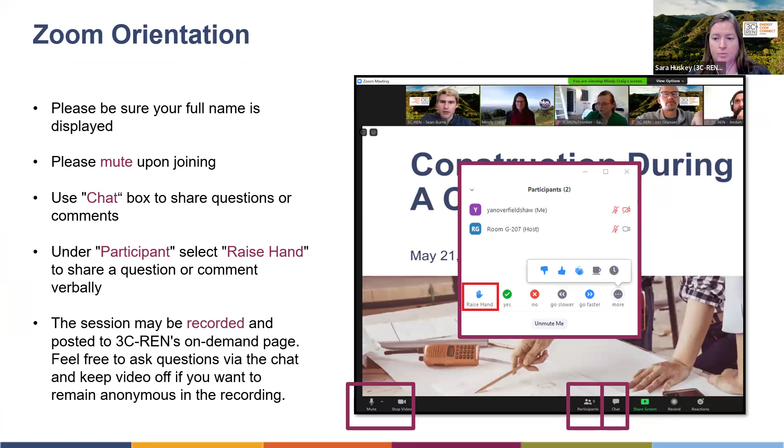Hi, okay, I'm in a meeting.

So a few words about us. 3C REN, we're the Tri-County Regional Energy Network. We're a collaborative partnership between San Luis Obispo, Santa Barbara, and Ventura counties, working to improve energy efficiency in our region by offering free programs and services for building professionals and households. 3C REN currently offers 3 programs.

The first program is our Energy Code Connect, which this course today is brought to you through. This program serves building professionals by offering Title 24 support for everyone from plans examiners and inspectors to architects and contractors. And we have our Energy Code Coach service through this program, which is an over-the-phone, online, and in-the-field support for residential and non-residential Title 24 questions.

Our next program is our building performance training, which serves building professionals by offering technical and soft skill trainings related to building science principles, high performance buildings, marketing, and communication techniques. And then we have our home energy savings program, which incentivizes contractors and helps residents save money to make their homes healthier with energy efficient upgrades through incentives and rebates. And with that, I'll pass things over to Jennifer.

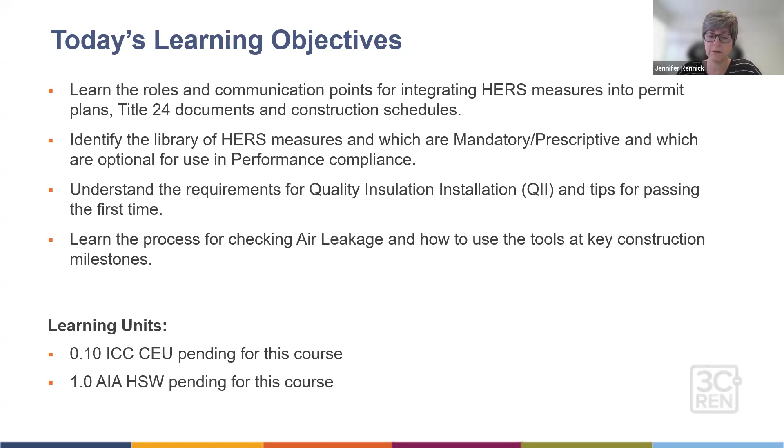Just to let you know, we've got learning units for today's course through the AIA and also through the ICC. Today's focus is really going to be on the envelope and quality installation, QII, and kind of the process for checking for building air leakage. A lot of the other HERS measures we will be hitting in our part 2 course. So today is kind of part 1.

So part of HERS measures for single family and low-rise multifamily construction is a process: we show compliance first, then we need to show that whatever we had put in those compliance documents to show that we met the energy code is installed properly. And then the third part of that process is that we have a verification that the installer installed those things to meet those installation requirements.

So on the single family side, we have our CF1R form, which is often called our Title 24 report. And then we've got our CF2R forms and CF3R forms, which deal with the installation requirements and the verification requirements of those items installed. Those are the 2 forms that Paul usually works on.

Oh, I should back up. My gosh, I didn't really introduce myself or introduce Paul. We just kind of went in on it. And then Sarah didn't really say that much either. You two should have stopped me. Okay, back up.

Jennifer Rennick, I'm an architect and a certified energy analyst. So in my world, I'm dealing a lot with that CF1R form. And then I'm joined by Paul, who is a HERS 1 and HERS 2 rater, BPI analyst, and is dealing with the in-the-field verification testing, and collecting those verification forms sometimes on the builder's behalf. Sometimes Paul can jump in, but yeah, Paul's mostly going to be taking care of the CF2R and CF3R forms in this process.

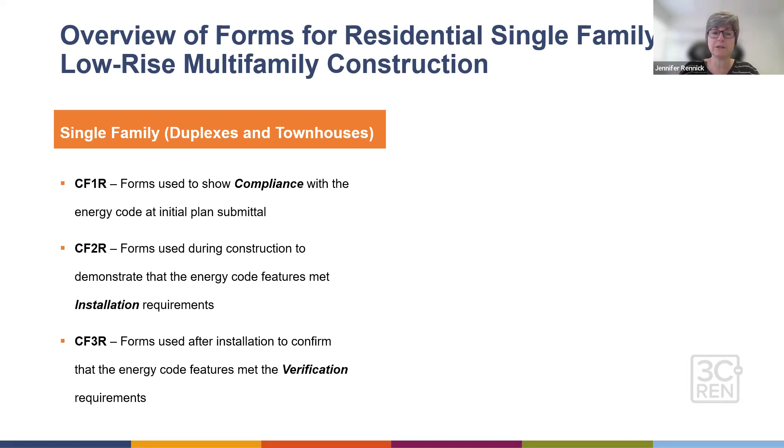Okay, so back now to the overview for the forms for residential, single family, and low-rise multifamily construction. We just reviewed those basic forms on the single family side, which includes duplexes and townhouses. On the low-rise multifamily side, meaning low-rise 3 stories or less, new under the 2022 Energy Code, there's a different set of forms.

So now we have an LMCC for low-rise multifamily compliance forms, and that would be the realm I work in most of the time. And then the LMCI and LMCV forms, which deal with the installation requirements and the verification requirements of those energy features.

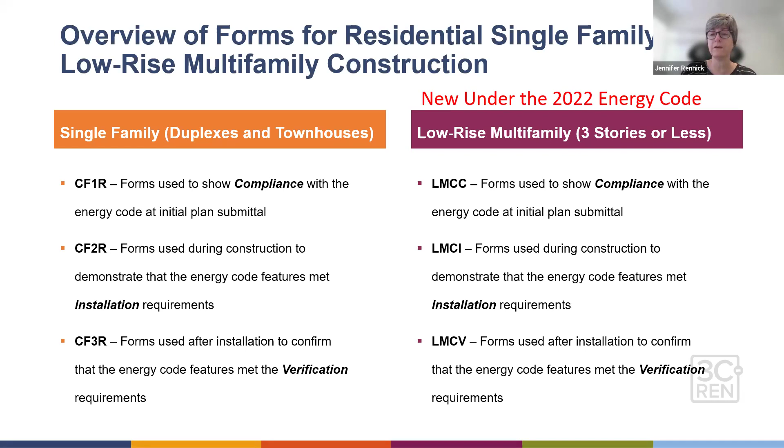We will address a little bit about where the California Energy Commission stands with those multifamily forms as we go through this. But another big picture item is that these forms do have to be registered with a home energy rating provider. HERS stands for Home Energy Rating System, and Paul is a HERS rater.

Right now in California we have two HERS providers, CalCERTS and CHEERS. These organizations are responsible for training and certifying HERS raters, and they support the California Energy Commission with the HERS registry. So many of us who've already worked on single family residences in California are probably familiar with HERS, HERS raters, and the HERS registry.

However, new in the 2022 Energy Code, the California Energy Commission pulled the multifamily portion of the building code out of the single family section. Multifamily now has its own section and its own set of forms. And so as of now, there isn't an up and running HERS registry yet for low-rise multifamily projects.

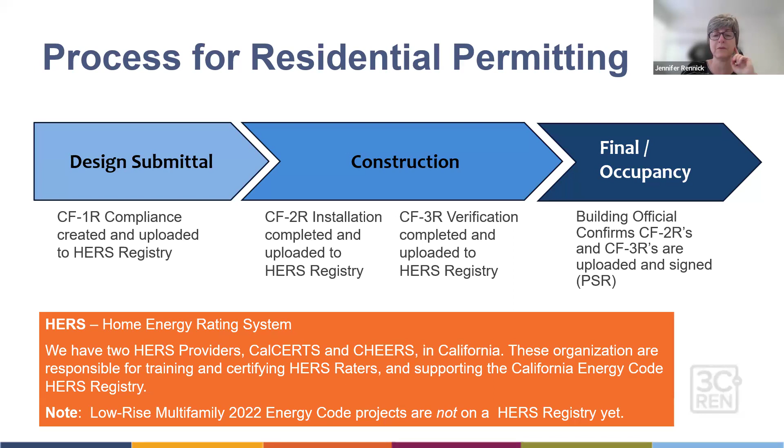In order for you to get an idea of what these forms look like—because one of the things I found, even as an energy analyst doing the CF1R side of things, the Title 24 report side of things—it's hard for me to even look at a project and see what the CF2R and CF3Rs coming into place look like. So what I do is go into the California Energy Commission website and take a look at the forms.

So that I have a draft copy and really have a better understanding of what they are. And if you go onto the California website, you can navigate to this page. This is the page for residential forms, and you can click the plus mark and it opens up and gives you a list of all the forms. I'll show you what that looks like in just a moment.

And kind of an aside—you're going to get a copy of the slides, by the way—but I just want to note here that most of the forms we're going to see are for reference only. So you'll eventually get a watermarked copy that's registered with the HERS provider.

And for the multifamily forms right now, one of those workarounds is that for prescriptive compliance, you can have a form-filled PDF through Energy Code ACE. And according to Energy Code ACE, the performance method forms are quote unquote coming soon. Then they're talking about those forms that would be equivalent to the CF2R, CF3R—it'll be the LMCI and LMCV forms.

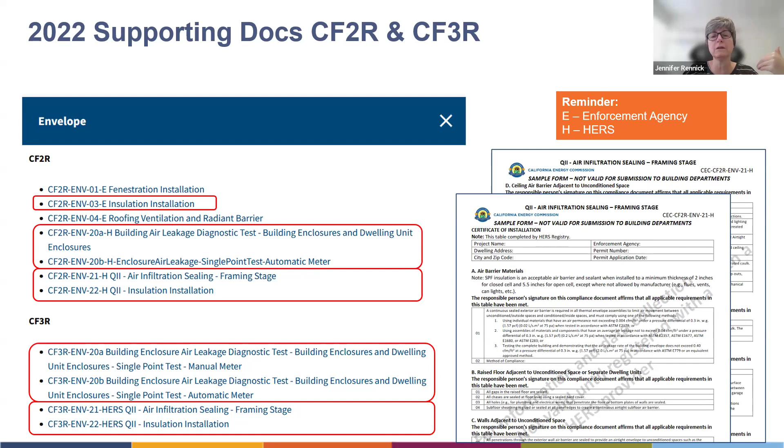And there's some CF2R and CF3R forms that go with that. As a reminder, if you go take a look at this list, or even when you're looking at the forms, if you see an E at the end of that form designation, the E stands for enforcement agency and the H is for HERS. Not all of them have an H after them. For example, the CF3R envelope 20-A, the building enclosure diagnostic testing, only your HERS rater could do that test anyway. So for the most part, you'll either see an H or they'll actually spell out HERS after it.

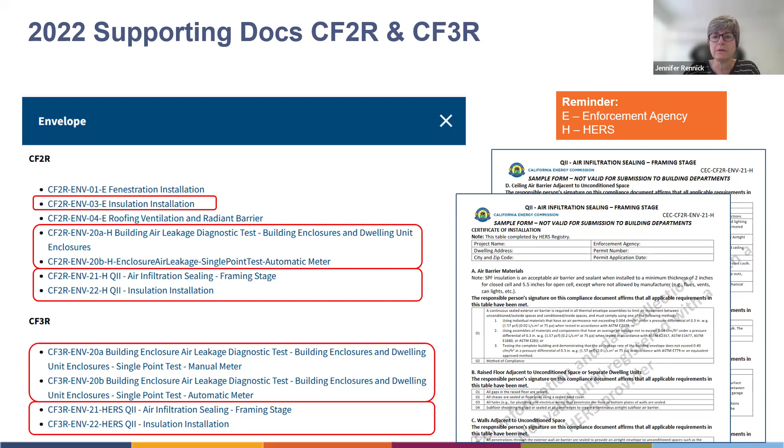And Paul, jump in on any of this stuff if you think this is kind of the boring stuff. I think it's a little boring, but it's necessary to understand this. Sure, then after we go through this, we'll get to the part with the pictures, and Paul can really jump in on what he's looking for and what he does. And then we could talk more about how you need to work with the architect, the installer, the builder, and the HERS rater.

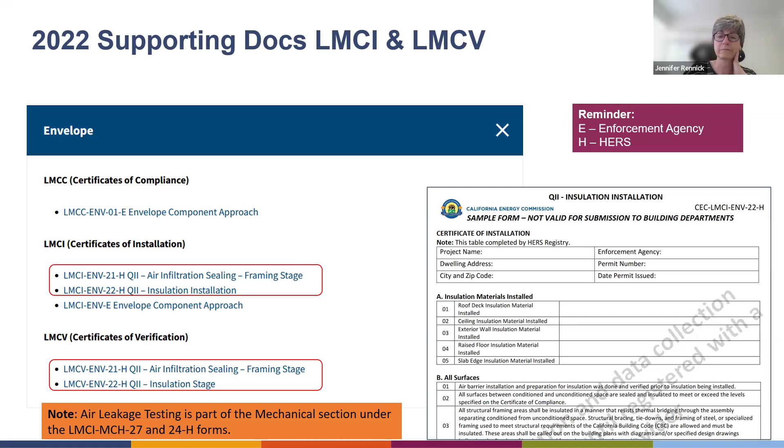Okay, so for the multifamily project, the LM for low-rise multifamily CI and CV forms, you can take a look at that. And we've got QII forms, quality installation, for both the certificates of installation and the certificates of verification. However, if you're wanting to know more about air leakage testing for multifamily, it just so happens that the air leakage testing is part of the mechanical section. It specifically would look at the LMCI or CV MEC 27, MCH 27, and 24H forms. Today we're going to focus on the envelope forms.

So when you go into the CalCerts website, and they have something similar on CHEERS, but I'm most familiar with CalCerts, so I'll address this as an example. You're going to see a list for a given project of CF2R and CF3R forms. And along with that list, you'll see those envelope or those MEC, or your plumbing, battery storage system, etc. These are the possible forms that could be triggered. Then you're going to have two columns that say yes, the certificate's needed, or no, it's not applicable. This will give you an idea as the architect, or have your energy consultant double check on this stuff if you want to know what forms are being triggered by their energy analysis.

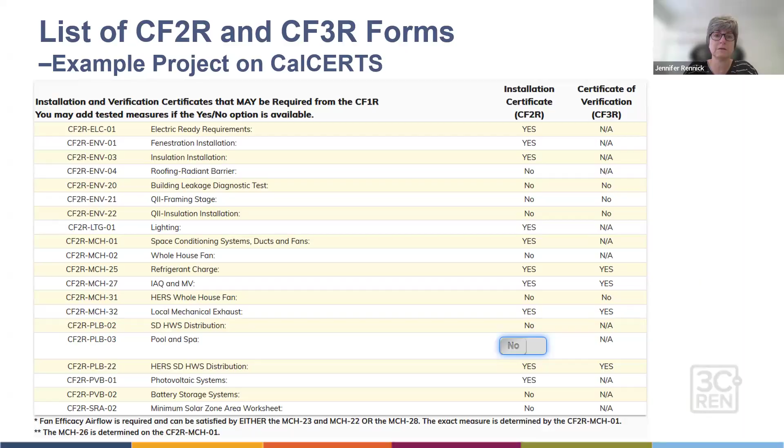So after those CF2Rs and CF3Rs are complete, the project can obtain final occupancy. So the big picture is: get the CF1R on the HERS registry, CF2R on the HERS registry, CF3R on the HERS registry, and now the enforcement agency, or AHJ, often heard, authority having jurisdiction, your planning and building department folks, can access those watermarked forms. What they really want to know is if everything you have to do is a pass. You can see on this slide the watermark will show up, like in this example, as a CalCERTS, Inc. with the star across the pages. And if it doesn't have that on it, it hasn't been uploaded and gone through the proper HERS registry, except for multifamily low-rise, they haven't gotten there yet.

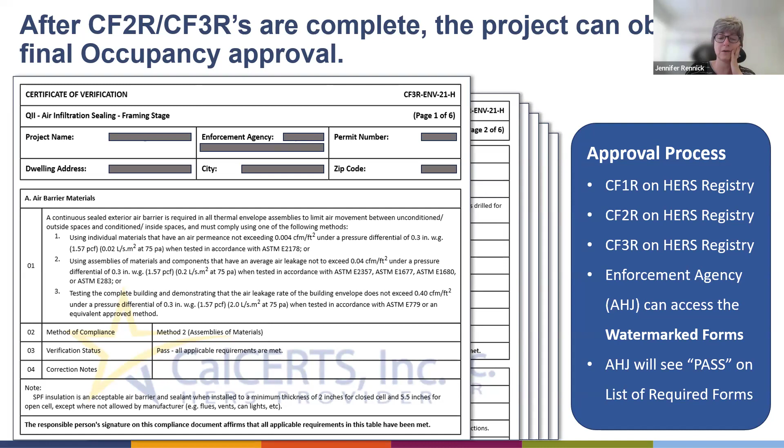So you'll still see, if you're an authority having jurisdiction or an architect getting those forms, forms that say not registered, but you will have to accept them anyway until the HERS registries are set up. So the authority having jurisdiction, once they go into CalCerts or CHEERS, they're going to be looking for the PSR, which is the project status report, to show compliance. What they're really looking for, and we've heard it in our office, is at the job site they just want to see the green dots or the green check marks. So they're looking for this part online, for everything to be checked, that it's complete.

So if I can just jump in, to the builders in our audience: either you as the builder or your individual subs are responsible for their CF2Rs in residential construction. A lot of installers are not savvy with the forms that are uploaded. So you as a builder, if you have staff that can supersede that or approve above your subs, you're allowed to do so, at least in both of the registries. Oftentimes, myself as a rater, I will upload the 2Rs on behalf of you, and then you will have the responsibility to approve those uploads in due course so that we can complete the circle. That's my input for that.

Sometimes there's a project we're all working on together, and the authority having jurisdiction just kept showing the screen on the iPad, basically saying, hey, I just want to see these check marks here. And the builder's like, okay, but what the heck does that actually mean? What am I missing? What really needs to happen?

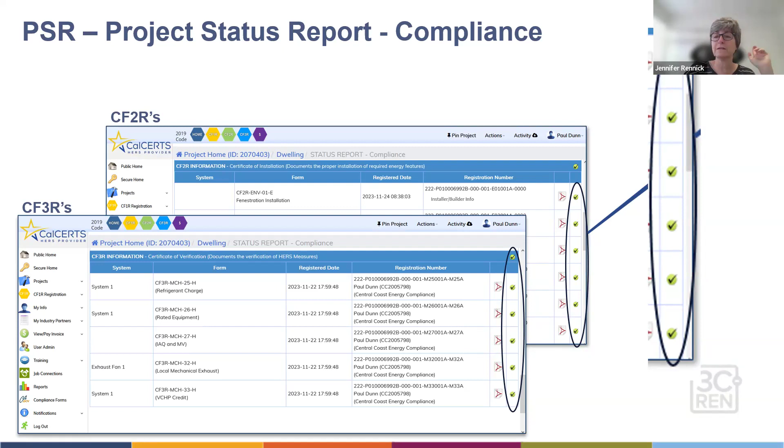That's where you need to coordinate with folks early on. So this next slide, we're going to go through that and show that a lot of this really works best as a team sport. So this flow process is that you're going to have your architect work with the energy consultant, and they're going to need to coordinate and have a CF1R document that shows that design meets the energy code.

And on that, a lot of times we're doing a performance method, a computer energy model. On that form, there's going to be a HERS feature summary that will show anyone who reads that report what kind of HERS measures are being triggered. So in this example, quality insulation installation is being triggered.

And it's worthwhile to note that QII is prescriptively required if you're going to comply using the prescriptive method, which is like a recipe card. You follow all the pieces, all the food ingredients on the recipe. You're not doing a custom chef special right now. It's just you're following the recipe. You got to do everything.

And in that recipe, QII is now a requirement under the 2022 Energy Code. So if you do the performance method, you could trade off not having to do QII, but a lot of times, since it's prescriptively required and your project's going to get compared to doing QII, we're seeing QII is just on a lot of jobs. So hence this class, and hence all of us talking about it.

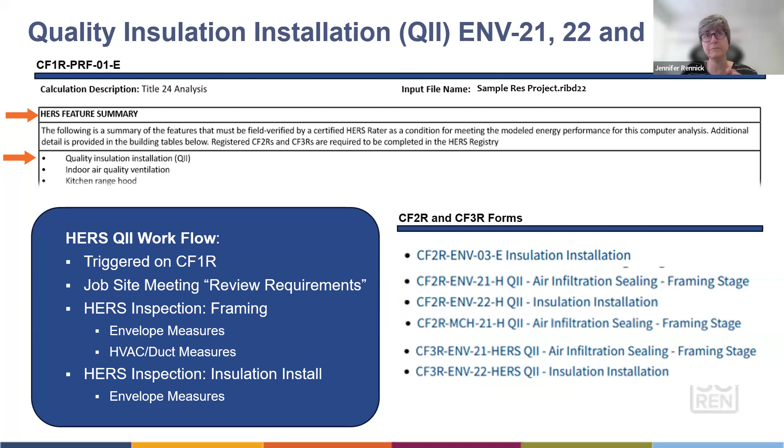I think it's good that I remind folks that the California Energy Commission, big picture, puts a lot of weight into the envelope, into the building assemblies for conserving energy. So how those walls are constructed, how the roof and attic is constructed, how your doors and windows and all the penetrations are air sealed, all of that is really forward up front in terms of energy savings in buildings, which is a tiny part of the real big picture of where California is going in terms of conserving energy, because it means the state does not have to build huge new power plants if we can just conserve and more wisely use the energy we're already able to create with our existing infrastructure, not including adding renewables to that portfolio.

So air sealing, QII, framing stage for low-rise multifamily, those forms are basically similar to the single family forms, except there's some items specifically describing where assemblies must be sealed to stop the air movement between dwellings. And also this form more explicitly spells out what air barrier materials, in terms of the actual technical requirements, can be used for air barriers.

In multifamily, it's not unheard of to use alternative materials. You can show compliance by doing the building air leakage envelope testing, not to exceed a certain amount. That way, if you use materials that don't specifically meet the air barrier material requirement, the testing is another way of demonstrating compliance.

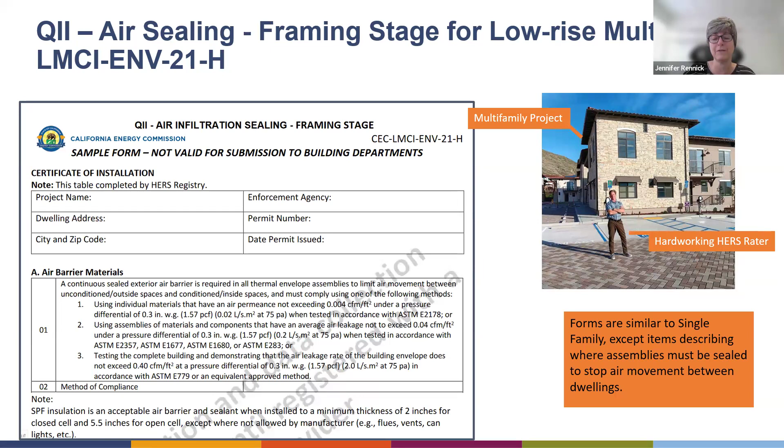Some of these air barrier requirements for multifamily dwellings are called out more specifically than on the CF2R forms. Each dwelling unit is treated like its own cell and self-contained. A dwelling unit to its right, left, above, below, or a common hallway along the pathway - each of those other elements is basically to be treated as exterior.

So between dwellings and from a dwelling to a hallway, all those penetrations and wall assemblies need to be air sealed and insulated as if they were to the exterior, to stop air movement between dwellings. Paul, you want to jump in and add anything on that?

That should make sense to everyone - if you have an unconditioned hallway, the wall separating that hallway from the dwelling unit is considered an exterior wall. Sometimes in multifamily you'll see hallways passively conditioned with some kind of ventilation system, which isn't really providing heating or cooling energy, just introducing fresh air. But we consider those unconditioned spaces, so the wall separating the hallway and dwelling is an exterior wall in that instance.

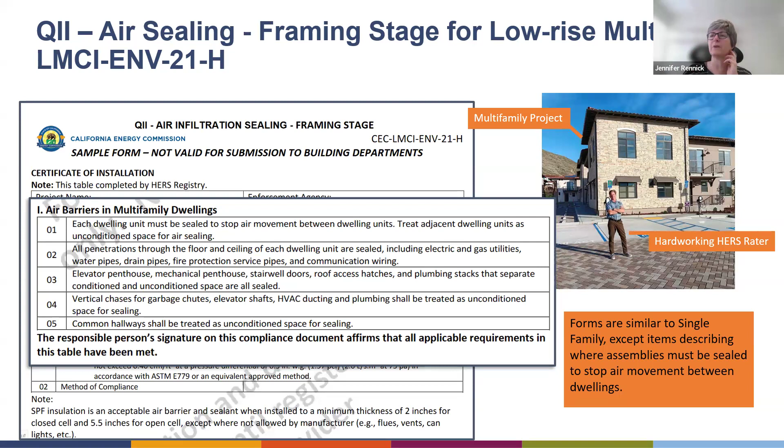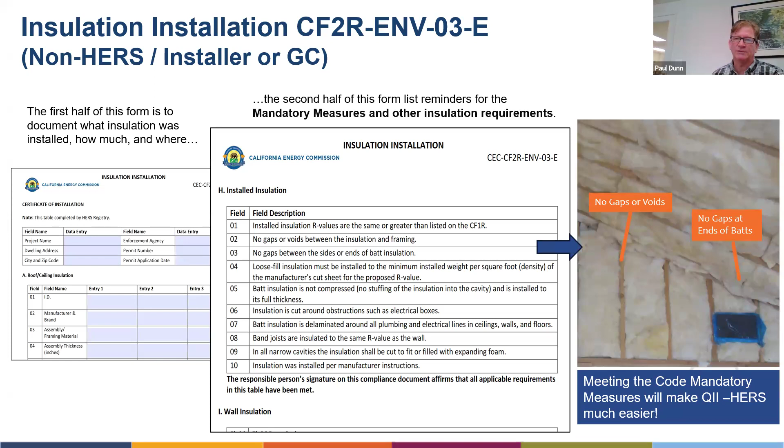This is a mandatory measure and part of QII also - it specifically spells out that insulation is to be cut around obstacles such as electric boxes. Batt insulation has to go through a process where you delaminate it, or pull the batt and split it in half up through its middle, enough to put some of the batt behind electrical wires and some in front.

Insulation is only going to do its job when it's trapping air. We're trying to make a sandwich here, like an ice cream sandwich, where the insulation's in the middle and it's trapped between two approved air barriers. We don't want any of the big three: gaps, voids, and compressions. On the right, you have a distinctive void that would not pass QII. Easy fix, just add more insulation to the cavity to bring it up to the level you see on the left, so that when the drywall goes on, it's in substantial contact with the insulation.

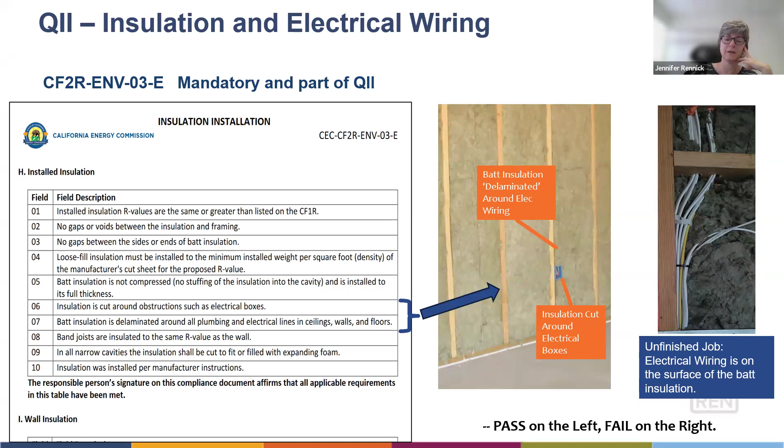In stark contrast to the one on the left, take a look at these shots from some recent jobs of ours. I know for sure the job on the right was fixed, but I don't know about the other two on the left. I would hope they got fixed.

I'm gonna let Paul address this part. When you go to your first inspection and the installer did not bring their A team - because at least locally in San Luis Obispo County and Santa Barbara County, certain installers have a number of teams that go out to various job sites, and some are better than others - you have to work with them. I like to show up the day they're doing it and work side by side with them sometimes to teach them what they need to do, so that when I come back next time, it's going to pass QII. So here I'm explaining to them what needs to happen so we can get all six sides filling a cavity, and that insulation is substantially in contact with the approved air barriers. I'll go along and show them with my own two hands what needs to happen to make this work for everyone, and it seems to succeed. So I build teams working with the installers so everyone's on the same page for what is going to meet the measures.

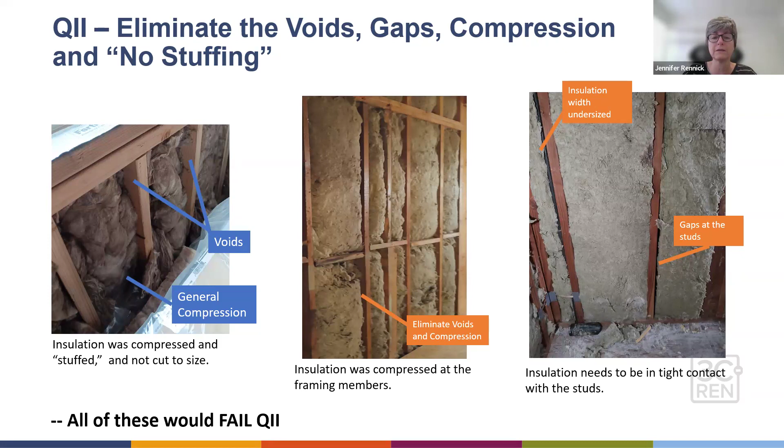These are fiberglass and rock wool examples, and this next one is an example of a blown-in product - this one's blown-in cellulose, but you can also use blown-in fiberglass. Right away with a blown-in product, when they staple up that fine mesh to hold the material in place, they'll put a hole or several holes in that membrane and blow in the insulation, which usually has a light adhesive on it to stabilize it and keep it from settling. This way they can see enough through that mesh, and you can blow in that insulation and lift, so you're not depending on just trying to do it all from the bottom or all from the top. When it's done, everything gets filled - no voids, no gaps. It's already fitted around the electrical box for the most part. You can come back and fine tune that if needed, but this can make it easy for QII.

As a designer, you might have clients who would prefer to use cellulose materials and lower embodied energy materials, so this can be a win-win for them.

This does require another skill set, because there's an art to filling these cavities just right. If you overfill, now you're making the drywall guys mad, because they're going to have to put up their drywall onto this overly puffed cavity. So they have to ramp up to speed and learn how to do it just right.

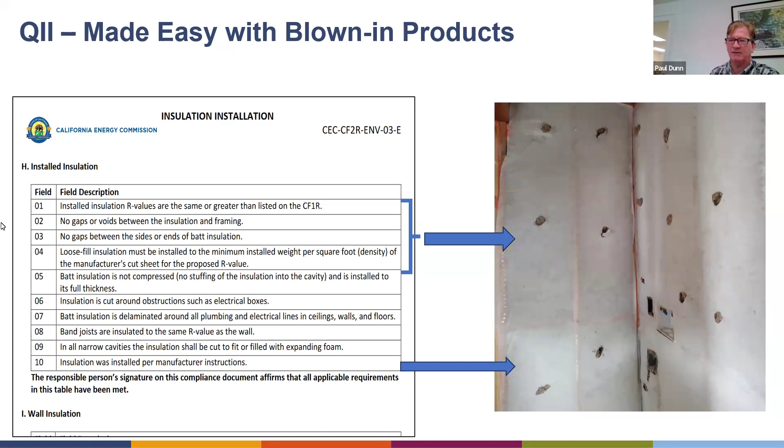Okay, and then when it comes to those framing members that don't have the big cavities that are going to be filled with insulation, part of the QII at the framing stage is to make sure that all the air gaps are sealed. So specifically, it's called out that narrow cavities around windows and doors are to be filled with an expanding foam that also air seals, which is a good way to do it.

Going back to the whole concept of QII, years ago we figured out that an energy consultant prescribing R13 in a 2x4 cavity, that was one thing in theory, but then the actual installer, if they're over-compressing it, now it's performing more like R-whatever, R11 and so on. So the idea here is that the actual installation is performing as modeled, that R19 is performing as R19, R21 is R21, and so on. And that's in your walls, and we'll get to the attic here in a few more slides.

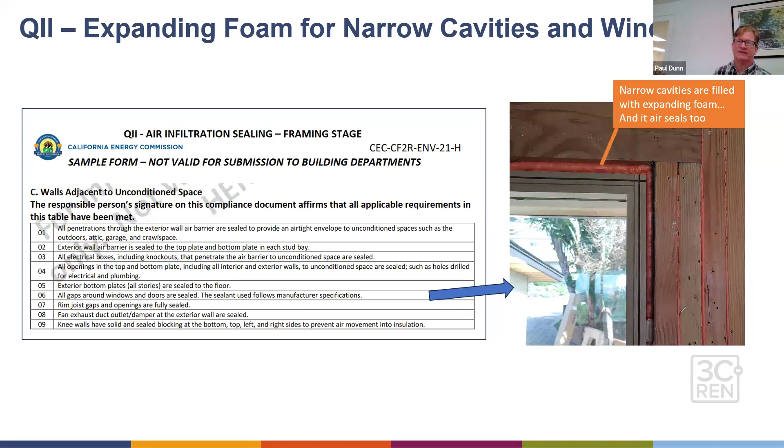To that conversation, as a designer, it's a team sport again—architects working with their energy consultant, but a lot of times they don't. When it comes to custom residential, multifamily is probably a little different in my experience, but especially with custom residential, a lot of times the architect doesn't necessarily know what that final combination of assemblies are going to be, because so much of that is dependent on the builder. So a lot of times, and I've had this happen, the homeowner, architect, and builder come back and say, hey, we're going to use spray foam, for example.

And the homeowner wants bigger windows after all. They changed their mind, so we're going to do a change order. We want more windows, and we're hoping we can use spray foam to offset that extra energy use due to those larger windows. One of the things we could do as an energy consultant is, if we have the specs on that spray foam insulation, it might be that that particular brand has a higher R value than the default values that the California Energy Commission has set up.

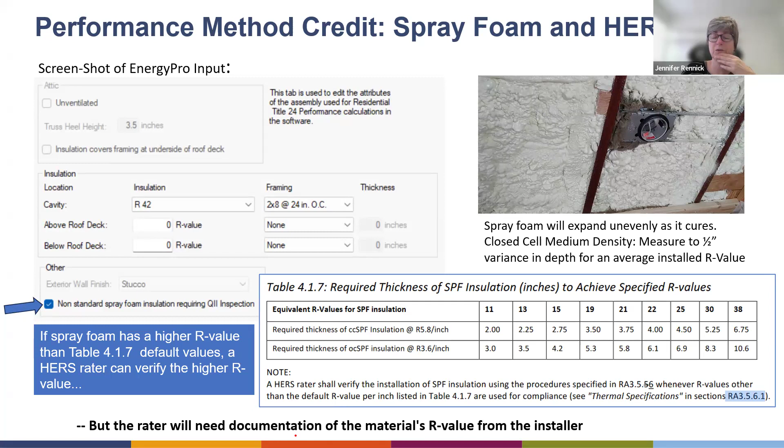Whoops, okay hang on there, accidentally hit the mouse there.

So for existing HERS existing conditions and new construction, I'm going to let Paul talk about these two slides. For those architects being approached by a client who wants to do an addition or alteration, hardly anyone seems to take credit for HERS existing conditions, which is folded into the CF1R. It provides a substantial credit and a benefit to the consumer, the homeowner, the architect, and the Title 24 person about what is actually going on in the house.

It used to be we'd just assume a house built in a certain legacy had a certain R-value in the attic, but often what we thought was there isn't there. It could be better or worse, and insulation decays over time. Looking at the left, once upon a time this was probably R19 insulation batts put up there, and now it's decayed down to some other R-value, which is a fair assessment giving the potential to increase it by adding blown-in insulation as part of the project. That's the low-hanging fruit in a HERS 2 energy audit style analysis—the first thing you usually add is attic insulation to improve thermal performance.

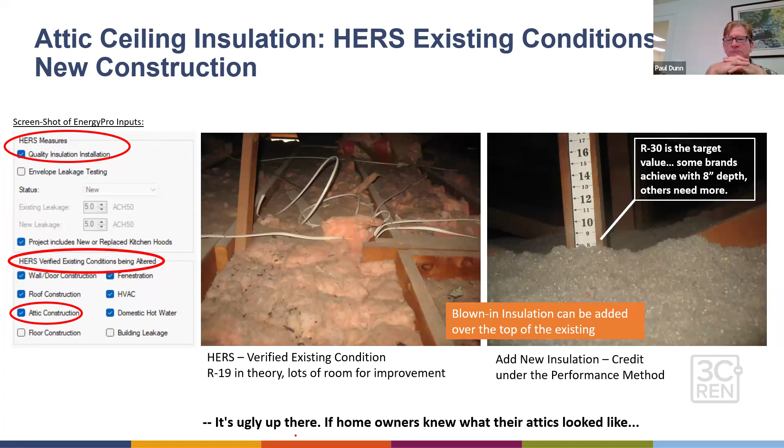Yeah, they want a 16 by 8 rolling wall facing south, or west. Exactly, right. Oh, I think there's a question in the chat—I don't know if you can see it, Paul. Let me navigate to that and address that question.

Maybe now, because we're going to talk a bit about spray foam as an air barrier. While Paul's taking a look at that, I'll give a preview on the spray foam discussion. A lot of builders tell us it's very cost effective to use closed cell spray foam to air seal the whole roof deck, sometimes the walls too, air seal everything, and then fill the remaining cavity with either a blown-in product or batt insulation. Here's an example of two different projects, but they could have been on the same project, with the 2-inch closed cell spray foam adhered to the underside of the roof deck on the left, and then the remaining cavity filled with batt insulation.

What's explicitly spelled out in the CF2R form—if you download those forms and have them as a tool, it'll remind you that the air barrier material noted SPF, meaning spray foam insulation, is an acceptable air barrier and sealant when installed to a minimum thickness of 2 inches for closed cell and 5.5 inches for open cell.

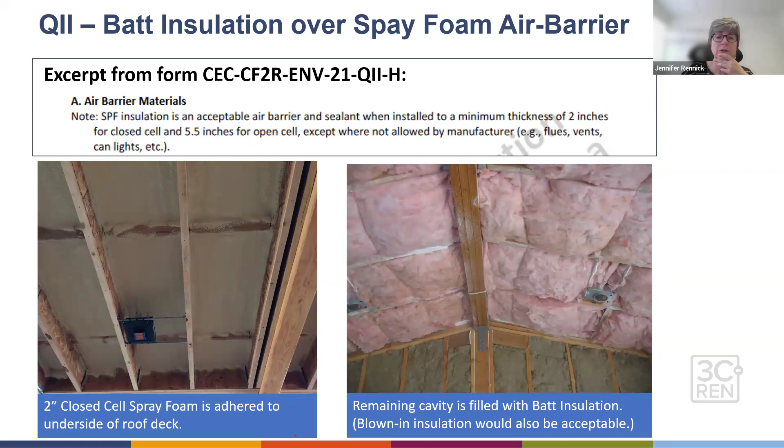And here's an example of what that looks like, both for the walls and roof, in a particular project that Paul was working on. Yeah, okay, that's an ADU in Morro Bay that I visited about a month ago.

I want to address the question. You want to do that? Yeah. So the question is, do I have an opinion in regard to spray foam on top? So tongue and groove is a unique situation.

If it is tongue and groove with attic space above, we know that's notoriously porous. If people like the look of T&G, you really want to have some kind of air barrier on the other side of it, then you can apply your T&G. Now this situation is, say, a non-vented attic where it's a roof deck style, and the intent here is to add insulation on top of that. That's a rare situation around here and would be something you'd want to be careful with because of moisture that could get into that assembly.

So the question is whether or not you would want to spray that sleeper cavity to the point where it would get maybe oversprayed, and then you would shave it down so it would be completely filling it, and thereby you can put your sheathing on top of that, your ply or whatever. Yes, I would agree you have to at least meet the R value. It depends on how thick those sleepers are going to be. But again, I would really want to work with someone who has done this before, so you don't have any possibility of moisture entering that cavity. I hope that answers the question.

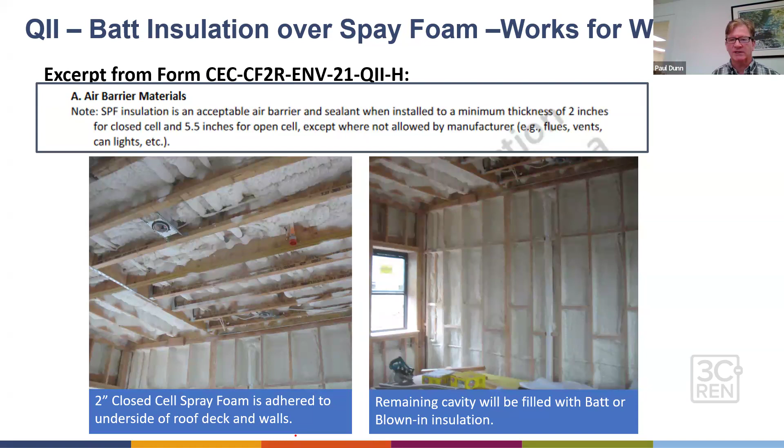We're going to click to the next slide and take a look at attics that have blown-in open cell products. The most common one, when they say open cell, it's that Icynene product. It can really expand a lot and get really thick really quickly, so there's an art to spraying that material into the cavities—it really expands quickly. Then as it cures, it skins over, so it feels like it's kind of closed cell on the surface, but that's just a light skin on an open cell product. You can really tell the difference when they spray the closed cell—it's denser and has a waxy finish that you can tell is acting better as a vapor and air barrier.

And again, they list out these requirements on the form. So if you get a draft copy of these forms, it's a good checklist of all the things you need to be paying attention to and looking out for.

And then one of the things a HERS rater does is look at the actual depth of those blown-in products and see: does the average depth meet the density? And if that depth and density gives you the right R value for the CF1R, then if it's been met, great. If not, you might have to go back in and add more insulation.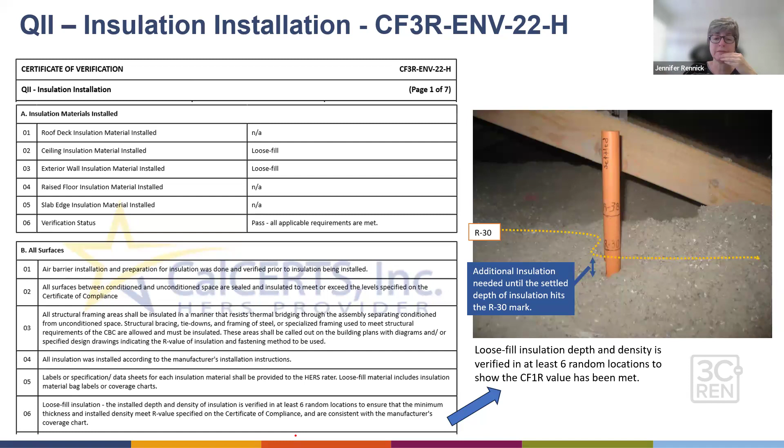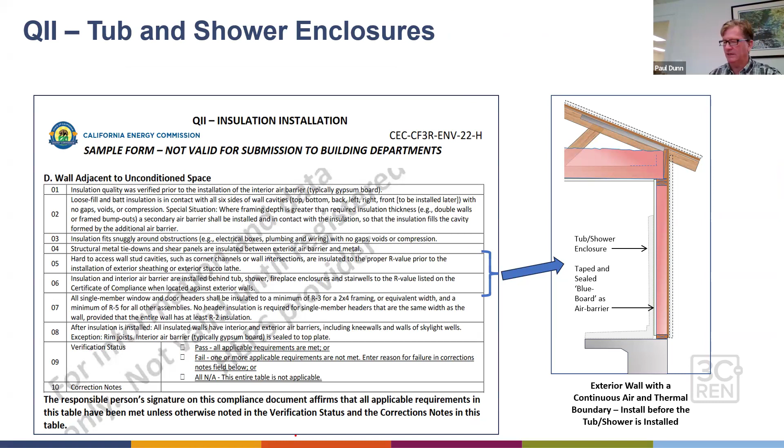In production housing, that's not a huge deal if they're shy on their insulation depth that they're blowing in, because chances are they're going to be in the neighborhood the next day anyway. And I've had to have people come back and what I call touch up, because they just were not consistent in the even level of installation to meet the R value.

Now here's a good one. We put this in because this is really a common area that Paul comes across when dealing with QII and air sealing, and that is tub shower enclosures. So basically, the bottom line is that the air barrier, such as Blue Board in the bathroom, has to be taped and sealed and the exterior walls insulated. Then you put in the tub and shower enclosure. That's the way it's kind of spelled out in the process and the codes. And so it becomes a sequencing concern for the general contractor a lot of times, how to deal with this.

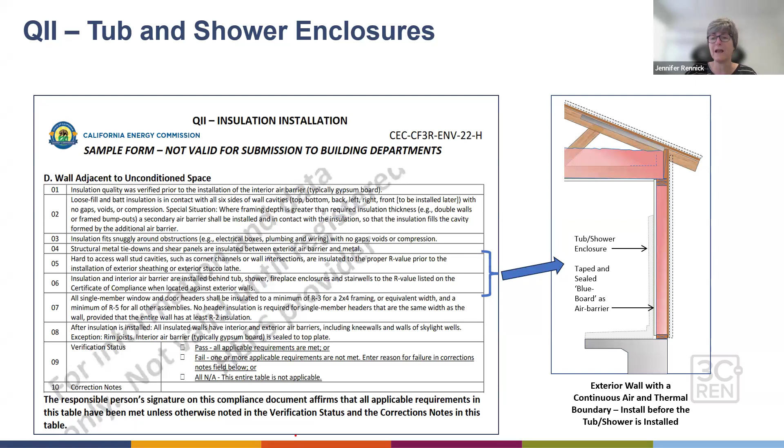Here's a couple of examples that Paul's dealt with on some projects, and I'm going to let him address this. Then once we go through these next couple of slides, we're going to quickly go through some of the air sealing and the blower door testing, and then finish up for you.

Yes, so to the contractors in the audience, I'm just always amazed how early tubs get set in the building process. Before you get your tub set, and this goes all the way back to the pre-con meeting, we need to plan for an approved air barrier between those tubs, showers, whatever, and an exterior wall. So what you see on the right is just something rather than nothing in terms of a potential go-around. There was once upon a time something flying around in our HERS rater world that if you use two layers of Tyvek, you could meet the perm rate for an air barrier. I'd prefer to just go ahead and have a layer of thermoply or some other approved material to trap the air behind that tub.

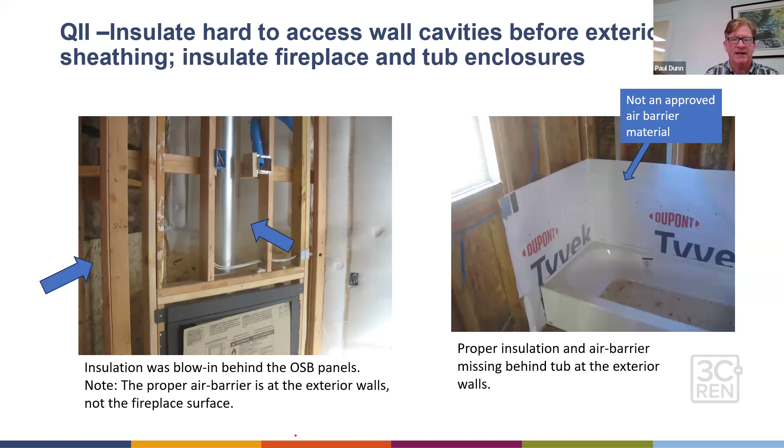Right. So then again, that sequencing, and then another sequencing issue - quote from Paul, I found that certain trades can affect thermal performance in a bad way.

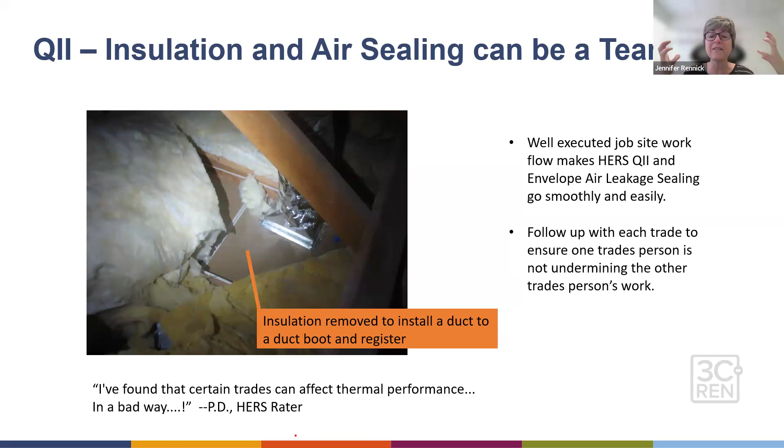This is super fresh, just from a job I was on yesterday. A really nice remodel in Atascadero. Oftentimes when I'm rooting around up in these attics, I see instances where we can blame it on anyone - the cable guy, the HVAC guy, plumber, electrician, whatever. They need to get to certain things to do their work. If they would just please put everything back, it would really help the cause. So this is a pretty common sight up there. It's just part of like, okay, if you have your general contractor, it's like the team captain, and you kind of make it a team sport. You follow up after all the other trades, and give the homeowner, give the client the building envelope integrity that they had paid for, is the way we see it.

There's a lot of metrics for that flying around. The current most popular is air changes per hour at a certain test pressure, the most common being 50 Pascal, abbreviated ACH 50. Basically what you're doing is pressurizing your dwelling to a certain pressure, 50 Pascal, which is about 0.2 inches of water column or something like that. Not enough to pop your ears, but enough to ascertain what the leakage is.

Using other tools, you can figure out where the leakage is, most commonly a smoke pen. I carry a thing around in my work truck called a pressure pan. We can go to various areas, mostly light switches and junction boxes and so on, to see if there's pathways for air to infiltrate or exfiltrate in that dwelling.

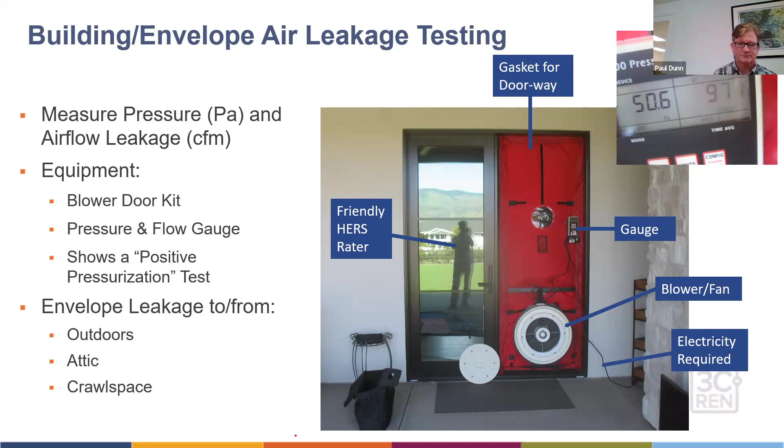So this is what I carry around in the work truck for envelope leakage testing. There are other tools you may need to have.

I was on a job in Santa Ynez Valley with some really fancy HVAC supply registers, called slot diffusers. Some of these are like 12 feet long and about 4 inches wide. For duct leakage testing in that instance, I carry a big roll of kraft paper that's about 6 inches wide that we just blue tape onto those diffusers. But if I can run around and do this kind of test on your standard 6x12 or 8x14 supply registers, it's an easy game.

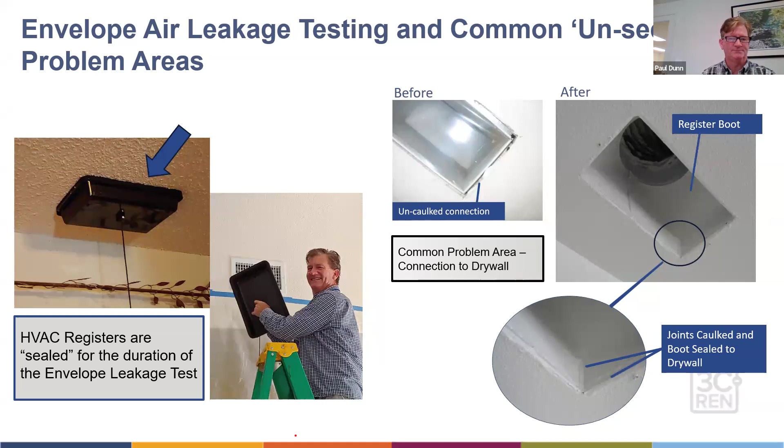Okay, and then from the building energy code side, coming back to a performance method and maybe the design energy consultant working with the architect, often the question comes up: hey, if you need more credit - let's say I'm using extra large windows again as an example and need a trade-off - a lot of times I say, oh, we have to do air sealing anyway, it's a mandatory measure, and you might be doing QII anyway. Can we do envelope testing and get extra credit?

So the default now is 5 air changes per hour at 50 Pascal, 5 ACH 50, which is a fairly tight house when you consider that some of the houses we've gone to might leak at like 30 ACH 50. Even though all this air sealing is a mandatory measure, it doesn't mean it always happens the way you think it should, so your building's considered to be pretty tight already.

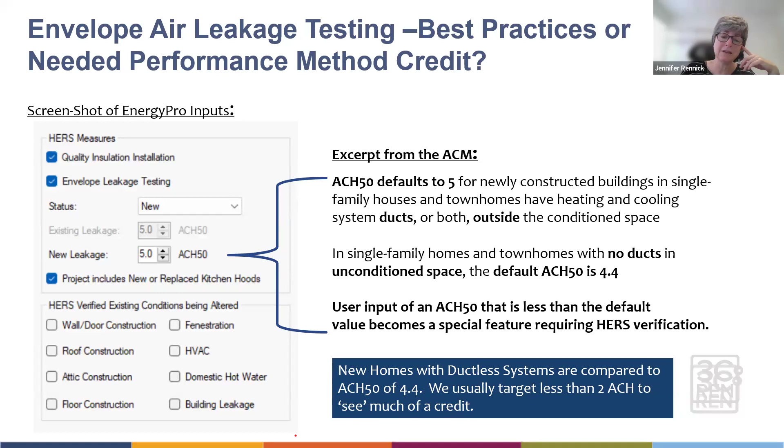And then if you have ducts within the conditioned space, so you're going with a ductless system, that default ACH 50 you get compared to drops to a 4.4. So to give you an order of magnitude, we're usually targeting less than 2 ACH to see much of a credit.

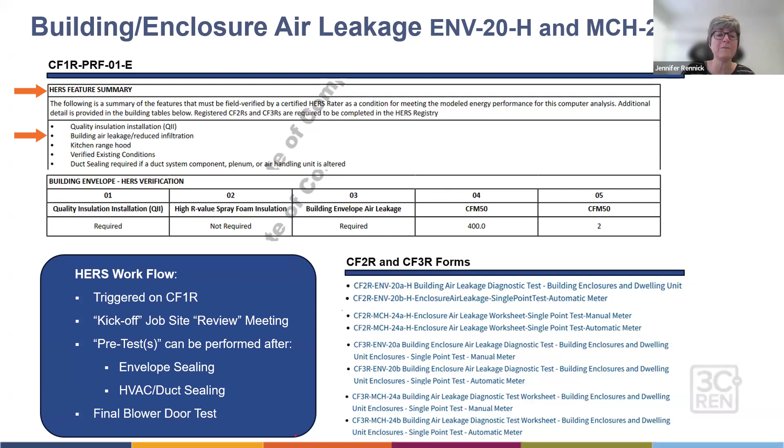And what this looks like on your CF1R is the HERS feature summary will show it. It's going to be part of QII, but also explicitly have building air leakage, reduced infiltration called out. Then there's the building envelope HERS verification section where it's going to say, yeah, your QII is required, but your building envelope is required. Then what is the overall cubic feet per minute at 50 Pascal? CFM 50 is 400 for this ADU example I was doing.

And then column 5 says CFM 50 again, but really that's the air changes at 50 Pascal, and 2 was what this particular example called. If you notice this on the Title 24 report, you're definitely going to want to bring this up at the job site review meeting, and do some pre-tests to make sure you're meeting these requirements, so you have a chance to go back and air seal things before that final blower door test is done.

I'm going to let Paul mention a couple things, and then we're going to give you some examples of what some of this air sealing might look like. Can you go back one slide, Jennifer?

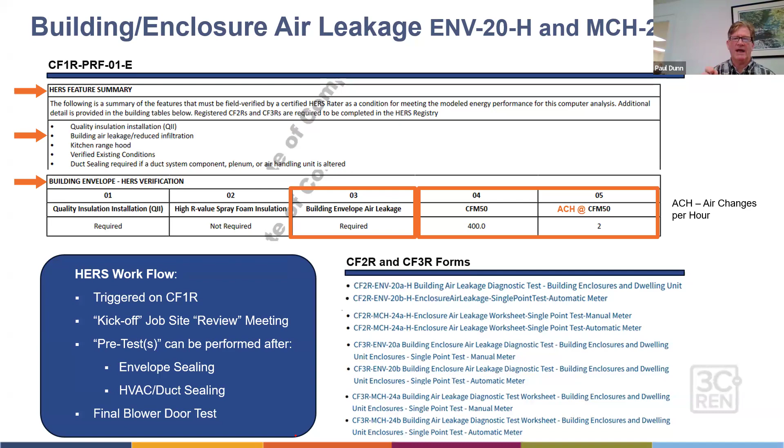The company that built a huge house up in rural Paso Robles asked for a blower door test, but the house itself was over 7,000 square feet. That blower door device I have can only really get up to about a 5,000 square foot dwelling. So if you're going to try to rope this into a HERS rater test and it's greater than that, you'll have to have another blower door—in other words, 2 of them—to get the pressure added up to test that dwelling if it's over 5,000 square feet.

That's another reason some folks are moving towards doing that 2-inch spray foam, 2-inch closed cell, to kind of air seal everything. They're trying to get that.

And then I'm going to give you some examples of air sealing and what it looks like in some of these more tricky areas. So the top picture is from a project I was on—they've got expansive spray foam all around the sealed ducts before it's connected into this daylit basement that's going to be conditioned, and then going out into a crawl space.

And the U.S. Department of Energy has a great guide for ways to show contractors the proper way to air seal around typical breaks in a ceiling. They show using sheet metal and other cut air barrier materials and how to do that.

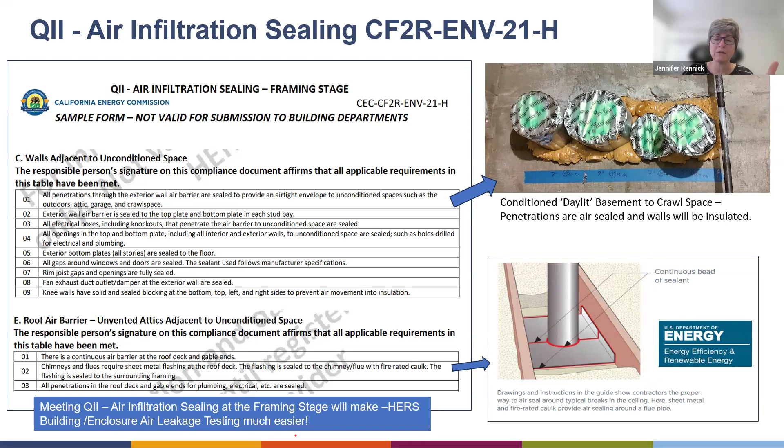And then from one of Paul's jobs, up on the top, they did a really good job of doing a continuous sealant around the exterior bottom sill plates, and those sill plates are to be sealed to the floor. That's actually part of the mandatory measures as part of QII, but a lot of times we're not seeing it done very well. So this could really be a common place for air leakage. That's where the AeroBarrier product comes into play, because apparently it does a really good job of dealing with those kinds of leaks.

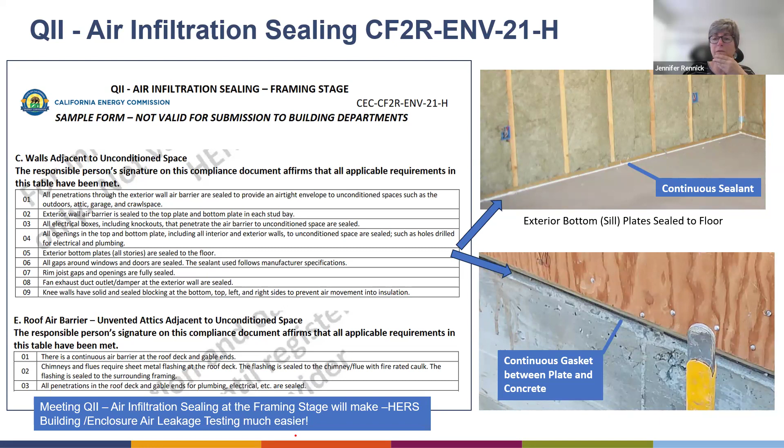Another method I've seen quite a bit is a continuous gasket between the plate and the concrete. That's installed on top of the concrete foundation or slab before your sill plate is put in place. In this particular example, you can see that gasket kind of squeezing out, and then that void could be filled with a backer rod before they do their final finish. This gives you an idea of another common way we're seeing this dealt with locally—these pictures are both from two local projects.

You can use a liquid applied material - it's not really liquid, it's gooey, more like a caulking material, but it's called liquid applied. You can caulk that out, or put it into a trough like the installer is doing here, and put that material into place to seal up the gap at the base of the plywood and your sill plate.

Another detail for folks learning more about passive house techniques for building: you can extend your plywood or zip sheathing long, beyond your sill plate. It's important that the plywood or zip sheathing material does not rest directly on the concrete, so you'll need a little interstitial bit of self-adhered membrane or other product.

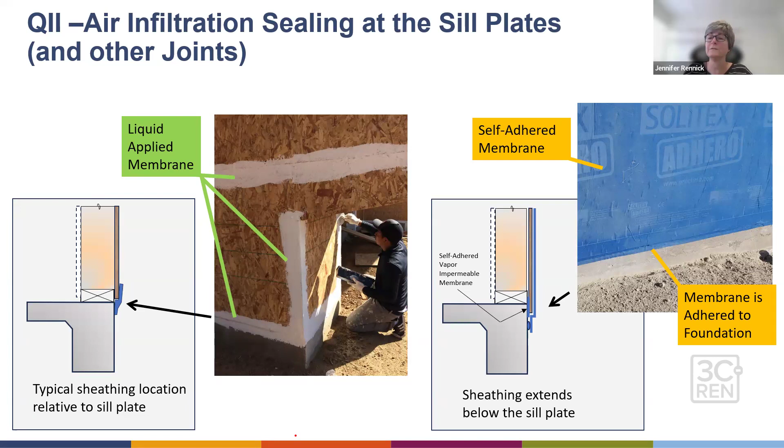These are all part of the things on this list for air sealing. If you are doing an alteration in a project, you still need to meet these air sealing requirements, and you might have existing light fixtures. You can either buy a specialized box that goes over the light fixtures, or create one out of drywall or sheet metal, but you're going to want to caulk the seams and make sure there are no gaps. This keeps the insulation off your light fixture while creating your continuous air barrier.

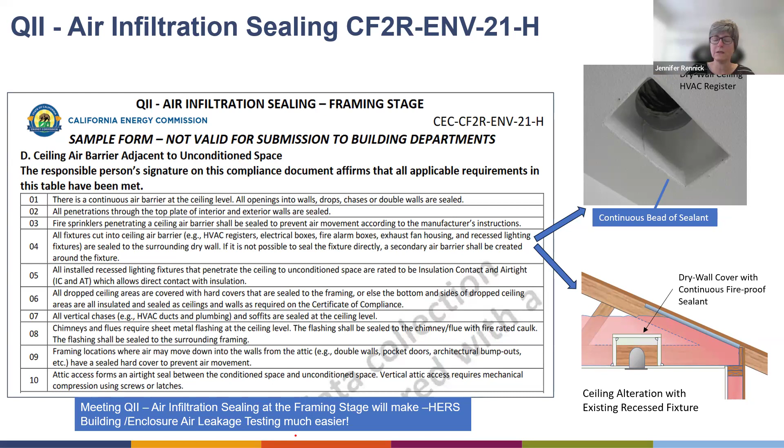We're going to close with a couple of other credits that are part of the mechanical systems credit, called the variable capacity heat pump compliance option. This comes into wanting to take credit for using ductless systems, whether ceiling registered or wall mount. We're mentioning it in this part 1 presentation because this credit depends on those mechanical systems being within the continuous air and thermal boundary.

In this example, it's a wall mounted ductless mini split, and where the piping for the refrigerant, the condensate line, and your comm line back to the outdoor unit penetrate through that wall, that also needs to be sealed, like some of the other examples we showed with expanding foam.

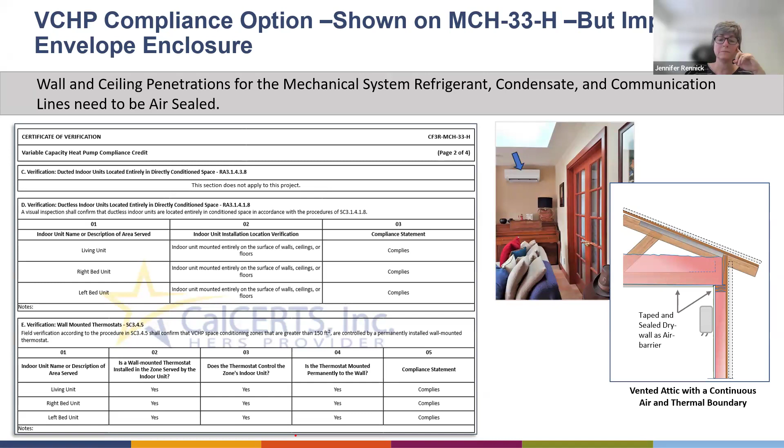But if this decision is made after all the construction documents have been worked out, and they're not going to go back and rework all these details, you could still get this credit by working with the energy consultant to create essentially a box for that ceiling register that is air sealed and part of the ceiling air barrier - part of the ceiling drywall - then adding the same amount of insulation required for the project on top of that box. Again, you'll get that within your thermal boundary.

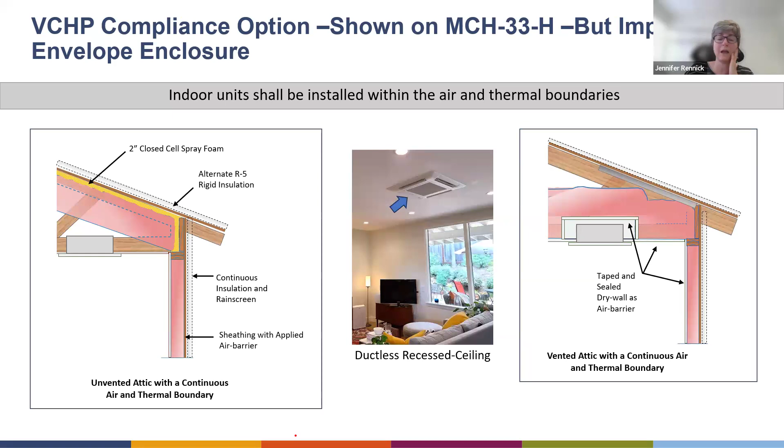So to wrap this up: when we're talking to architects and trying to help builders understand the project, we're starting to recommend that a project including HERS measures - which just about all of them do now - calls out some of those major HERS measures right on the cover sheet. We're suggesting it might be included in your code summary or code analysis section that you typically have on the cover sheet.

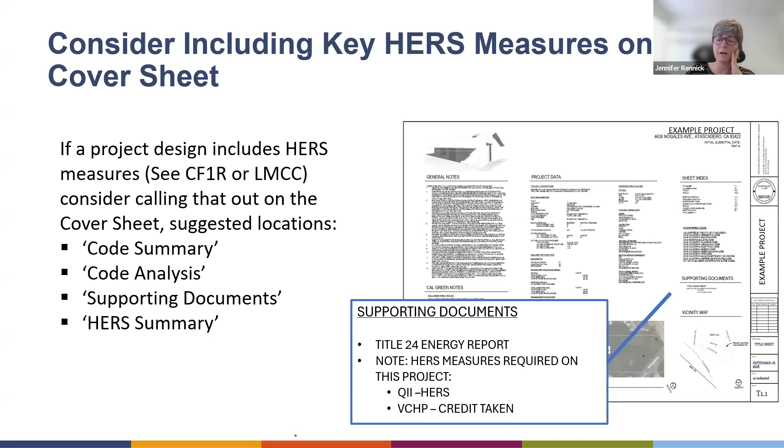Or in this case, you might have a supporting document section, and under that, you're often listing that a Title 24 energy report is needed, but then noting that HERS measures are required on this project - QII HERS, for example, or the variable capacity heat pump credit taken. We're trying to give a heads up that you really want to take a look at that Title 24, or you might just want to add a HERS summary block on your title sheet.